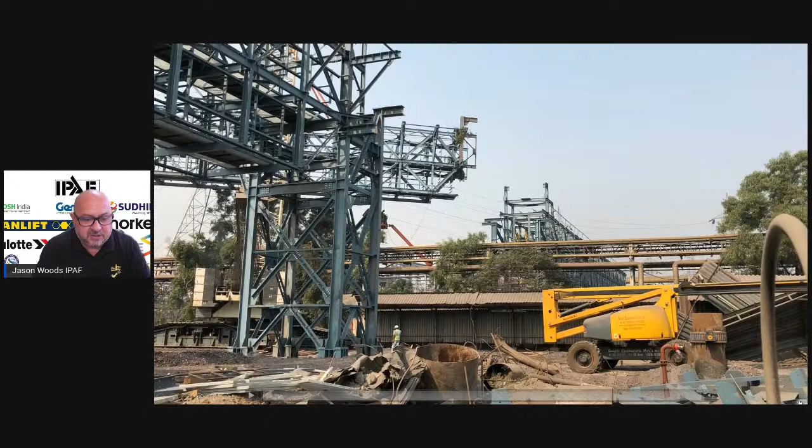In terms of today's session, today is a follow-on from where Chris just spoke about the case study of a project he was managing in the Middle East. As you've seen from the discussion, they were a very large MEWP user on the project through the duration.

You can play the video now, Ali, that's fine. They were a very large MEWP user, 900 pieces of equipment, different shapes and sizes, different phases, from steel going into MEP works, some spider lifts towards the finishing. You can appreciate that to manage this kind of equipment, having all the safety aspects in place from the day the equipment arrives to how we control it through the project. Naturally, with 900 pieces of equipment, you're looking at thousands of operators, and as Chris mentioned, 35,000 contractors on site at the peak, with more than 150 different nationalities there. So you can imagine the kind of workforce we're dealing with.

Obviously our focus today is more towards the operator, because it's a bit of a chicken and egg situation where we always emphasize the employer's responsibilities to train the staff, the workforce, but there has to be a turning point, and the turning point comes when an operator has now been trained, is on his project, has his equipment, and all of a sudden has to work.

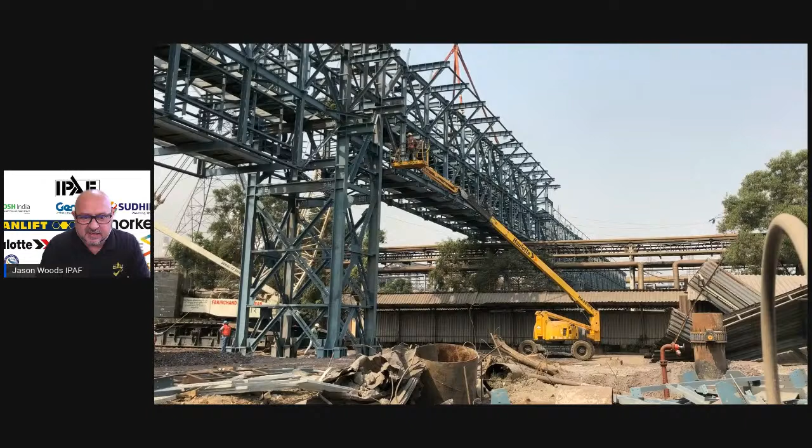Regardless of whether the machine is rented with an operator, which is quite the case in India, or whether it's a workman, a tradesman from the contractor who's actually going to operate the equipment, regardless who the operator is, we should start identifying the procedure from the operator and see where the operator's risks can occur. Now, operator risk is quite a big topic, so I'm only going to step into 3 key areas today, and as you'll see through the presentation, we will focus on probably the most highlighted ones.

Ali, if you can switch to the next slide for us. As you can see on the video just showing, it's just a typical construction site, nothing out of the norm, but you can see the activity, where the operator was generally at the ground and raising the platform into position. We had a hazard above where steel work was being positioned from the crane. And if you look very closely, you would have noticed that one of the passengers had actually climbed out, which, as you can see from my slide now, creates the real tipping point of operator risk.

So let's focus on the operator. Let's say we've done the training, the guy's certainly competent enough to get on that project. What do we find? Falling out of the platform is still a high risk. We still see it, in a term that the operator positions the platform where he's not quite in the right zone and the right work area, so he can't quite reach. So he has more of a tendency to climb and step up. Some only need to step up onto the mid rail, or unfortunately some go to the top of the handrail, which then increases the risk of that fall.

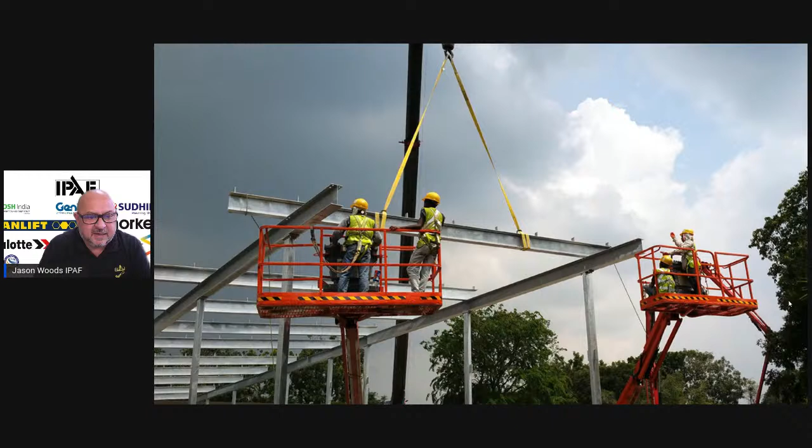Ali, if you can just go to the next slide for us. So again, some images, very basic images, typical worker working on a project. Are we doing anything wrong? Probably to the naked eye, you're going to say no.

But if you look very closely, I see a harness connected to a top handrail, which probably means it's not going to support that operator and keep him in a restrained position. It's the carabiner around the handrail, which would allow the operator to move and walk around the platform quite freely. We've seen some platforms yesterday where we can increase the size of the platform. So as operators, we still have a role, and we're obliged to make sure we're working safely.

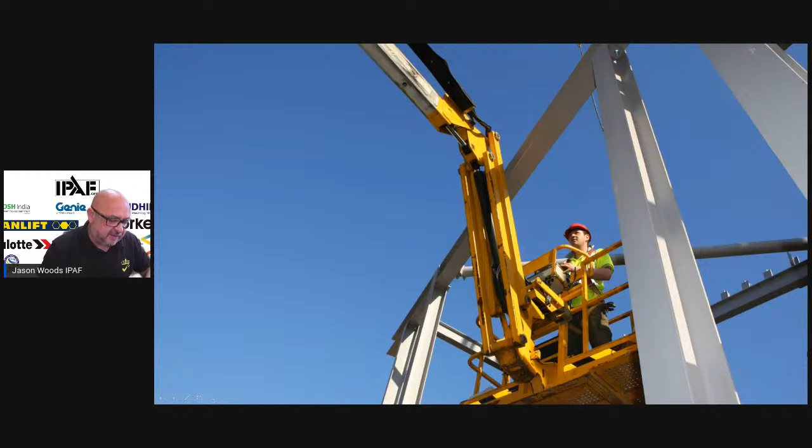So Ali, if you can go to the next slide for us. Again, just a very straightforward, typical application on a boom lift. If I'm a steel erector, I need to position my platform in amongst confined space at height. This is where it gets slightly challenging for the operator, because now it's not just about the drive positioning, it's now my lifting element. I need to understand the correct sequence of lift to get to the comfort zone for the operator.

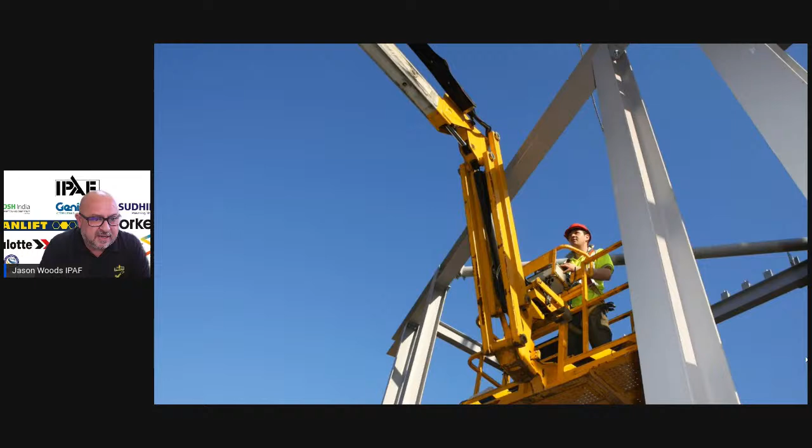Remember, once we're at height at these positions, we should have the ability as an operator to work quite safely. This is where the focus comes back to the operator, making sure the operator is actually trained and has certainly passed his assessments and exams, whether theory or practical. Okay Ali, let's go to the next slide.

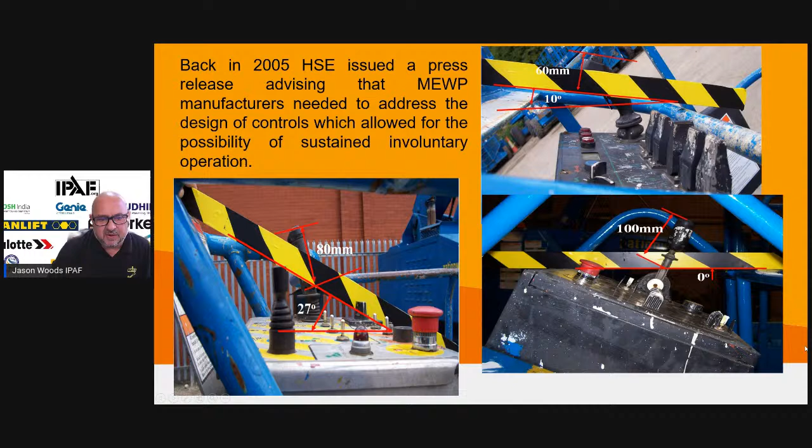Now, Ali, sorry, can you go back one slide a minute? As you can see on this slide, this is a platform control. If I take away the blue handrail in this case, that would mean I've got full access as an operator to these controls. So if I was to lean forward as an operator, I could potentially hit a control lever in that platform which I don't actually want to control. Maybe I'm working in a confined space close to the steel work, and if I'm not careful and not observing my movement, I've got a potential risk of an incident, meaning an entrapment. So as you can see, manufacturers back in 2005 started to put an emphasis on the control panel, raising a protector or guard around the controls, which would surely minimize the risk of an operator connecting with the incorrect control.

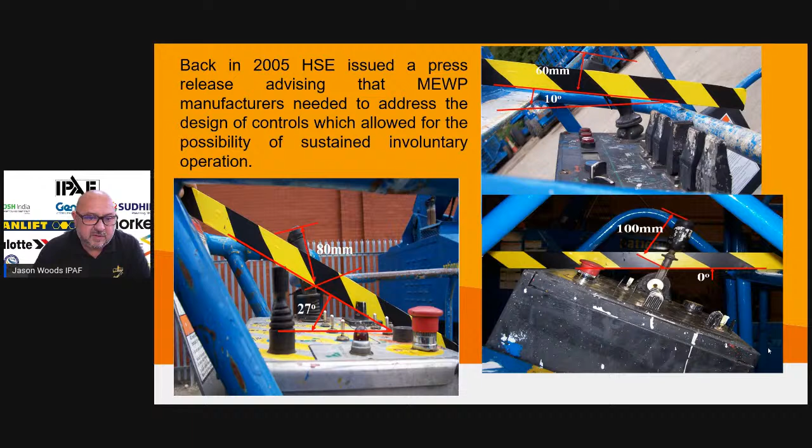Okay Ali, sorry, if we can go forward again now. So it didn't always just stay at a barrier around the controls. On the left side you can see a trigger. That would mean that if I needed to move, let's say for example my scissor lift, I would have to push the trigger in, and then I'm able to control that direction, either pushing forwards or backwards.

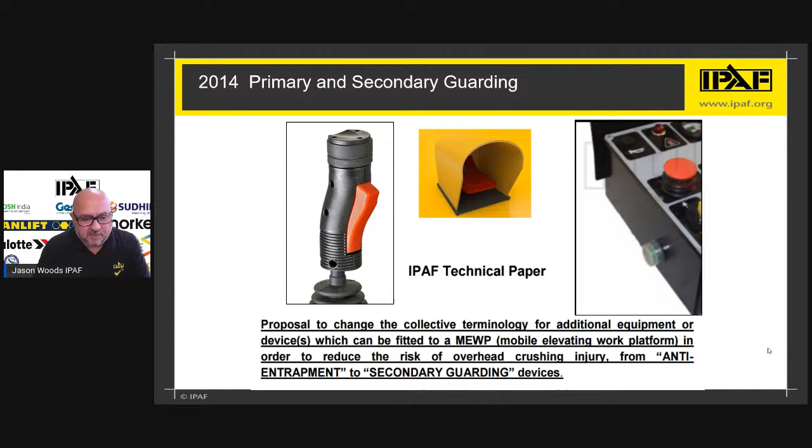In the middle, we'll see the old traditional foot pedal. That would mean that as an operator, I would need to push my foot on the pedal, then I would be able to function the controls. On the right side, you'll see a little green button on the side. That means I physically have to press that button in, and again, I can function the features on my control, whether I want to drive or lift.

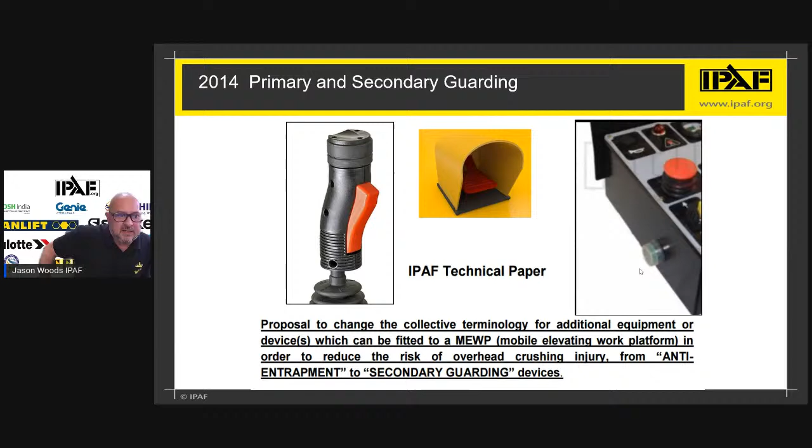But you can see that the research started a very long time ago of trying to reduce the risk of operators whilst we're elevated and working in confined space. So if we go to the next slide, Ali.

From a legal perspective, you can see that whether we talk about ANSI standards, EN 280 standards, or ISO standards, a lot of work in the early days was starting to be prepared. We'll call them white paper documents, but you can see that there's a chain of command, and this is our starting point. So at the very beginning, we listen to the audience.

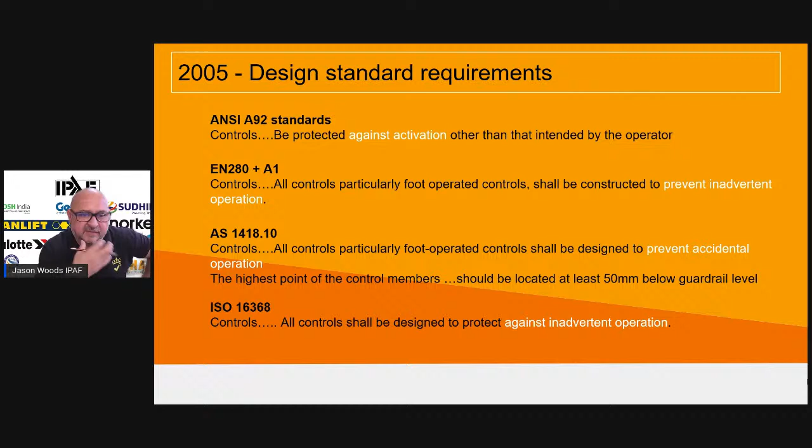The audience is naturally the MEWP operators. We research. As IPAF, we have a technical department, which does a lot of research, and we take in indicators of trend analysis of incidents, and then we push it through as a norm into work groups, which then moves into working with standard bodies and filtering it down as far as manufacturers. If you can go to the next slide, Ali.

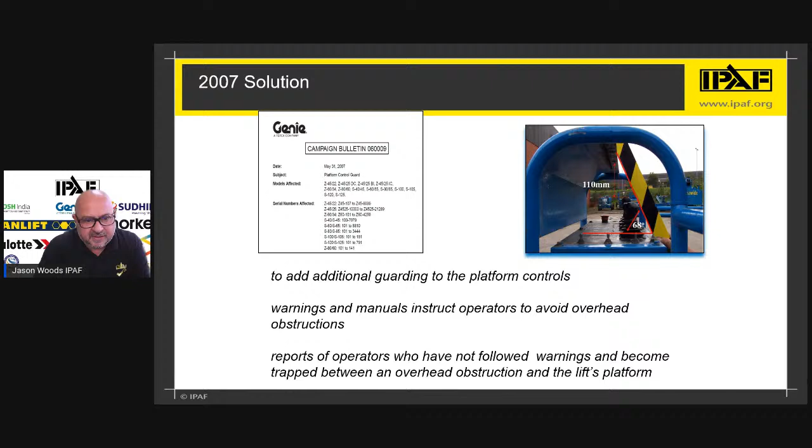Now keep tuned for tomorrow's talk, because we're going to talk about the voice from manufacturers out to the industry, and this is something which we're going to elaborate on in a little bit more depth with the guys. So Ali, if you can go on for the next slide.

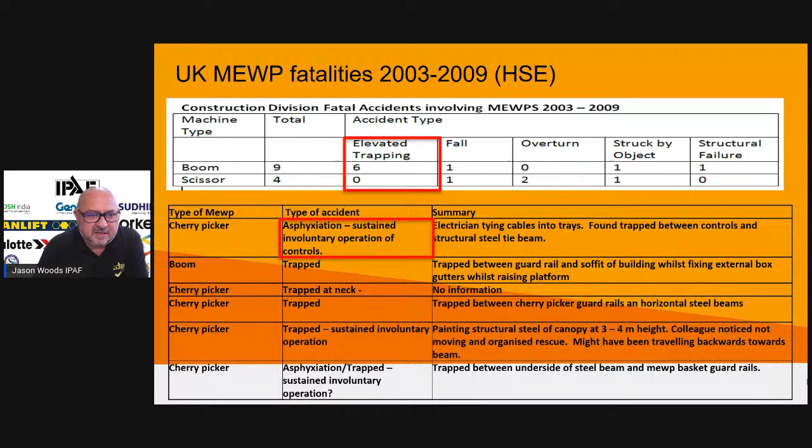Incidents are not new. Incidents have been out there for a very long time. If you imagine MEWP incidents, all incidents, we can only analyze what we see. So reporting of accidents is very important. It does a number of things: it helps us grow safety standards, it helps us develop training programs, and it helps us develop technical documents.

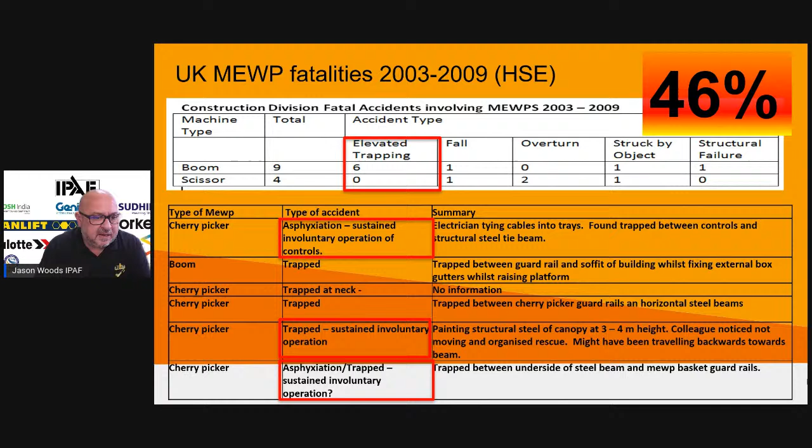Unfortunately, you get into a position where you're reactive to a certain level. However, there is that tipping point. If I use the IPAF technical team as an example, these guys are working very hard behind the scenes of development, and we will get to the point where we're ahead of the game, and it's certainly being a proactive position. Okay, Ali, if you can go forward on the next slide.

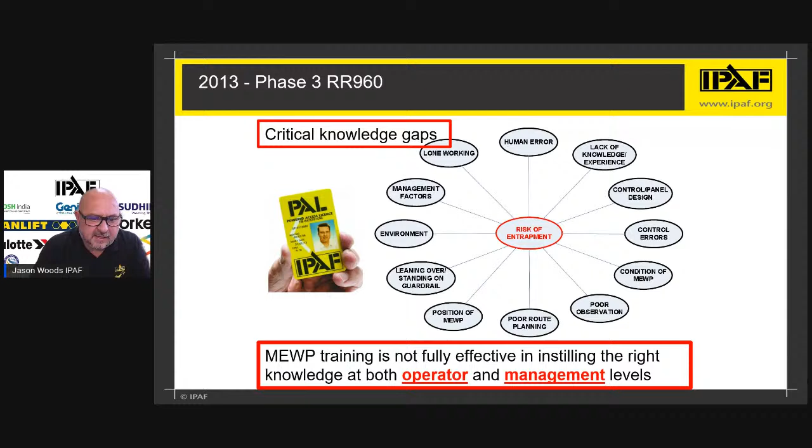Ali, if you can just jump forward. So let's talk about the development of the products now. Some of these names have already been mentioned earlier on. Secondary guarding was one. I know Chris spoke about this on his earlier presentation. Secondary guarding has been developed in such a fashion that it's there to either alert the operative or totally protect the operative.

So there are generally two different types of guarding systems. Now, let's not ever take away that the operator must be trained and competent. And like we've already spoken about training, surely there's a level of acceptable training. If I'm going to be assessed as a trainee, then naturally that's going to allow the operator to move the platform into position correctly and move into an area safely, because I'm always going to observe. However, there's nothing stopping us from having additional protection. As you can see on the left side, this is one example which has been out for a while, 2013 - it's an electronic version.

So what will happen is if I put myself in a trapped position, something is going to alert me as an operator. It's going to give me an alarm, and I have to act fairly quickly. With these designs, as an electronic version, the machine will cut out. On some versions, it will actually reduce the height by a few millimeters, taking any pressure points away from the operative if he's in that stuck position.

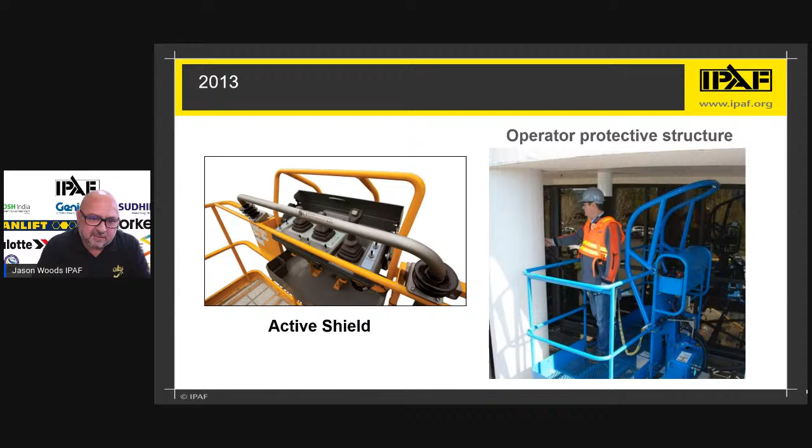Different manufacturers are coming in with different fashions and different guarding devices. You'll notice on this handrail that there's an inner handrail as well, to reduce nipping. If I'm raising the platform near the working edge of a building, naturally a worker will have his hands over the handrail. Now we're encouraging them to have their hands positioned on the inner handrail. Again, it falls under secondary guarding.

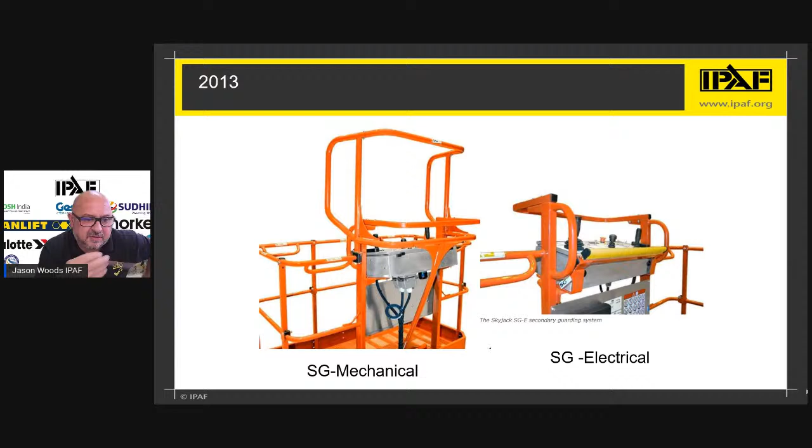I'm just giving you indicators of what is available on the market. We do have secondary guarding systems in India, and I would echo that if you feel your project needs this, talk to the rental companies and make sure the manufacturers are involved, because there is equipment available. But we must never forget about the operator. When he's trained correctly, he has a responsibility of moving that platform safely, so his eyes and ears are a massive help, and observation of platform movement is massive.

This device is an electronic device. If the body was going to become in a trapped position, it would naturally push the body forward, and once the body connects with the yellow indicator in front of you, the buzz bar, the machine would then cut out. This is just to give you an overview of where the development has been. Primary guarding was in the very early days, and then we moved into secondary guarding, anti-entrapment, and sanctuary zones.

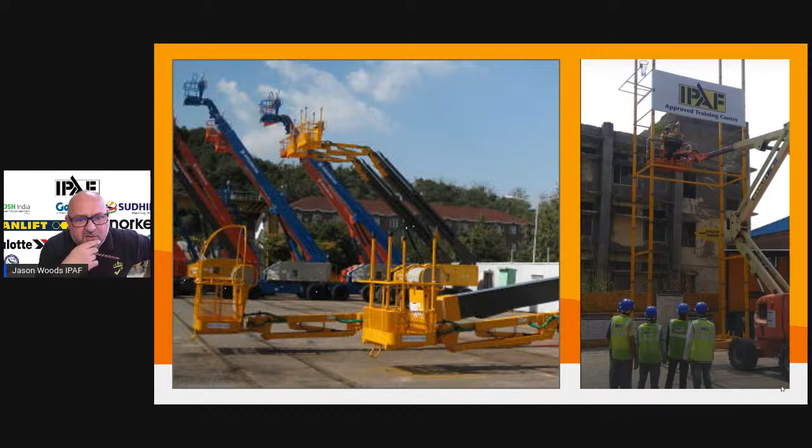Just a few more examples. On the left side, you can see sanctuary guarding systems, a physical cage, which protects the workforce if they have the need to work within a confined space. On the right side, this is one of our training centers in North India. If you look carefully, the person in the platform, part of his training, his duty is to position that platform through the confined space, creating a gap, and that's what I'm looking for.

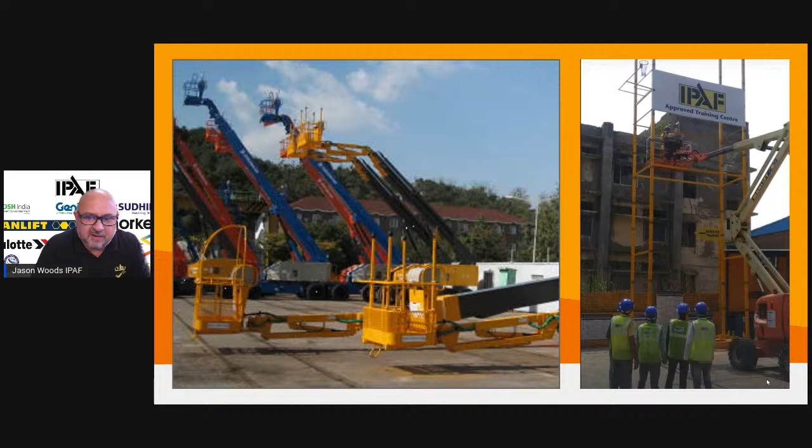A typical example of a very short video clip, indicating how an operator would move a platform into position. There's nothing unusual about this, but once it starts, you can see the observation of the operator is again quite a massively important role here. We embed these videos into our training programs, and if it's an instructor-led course, the instructor will play the video as he's running through the session with the students. If it's an e-learning module, then it's already embedded into the program.

As I say, there's nothing unusual about this. We're working on a construction site, in a steel frame process, maybe the roof is going on in this case, and we have a standard boom lift, or cherry picker as we call it, as covered earlier in the week. You can see where my focus is, that operator, and ideally I need to make sure he's safe at all times.

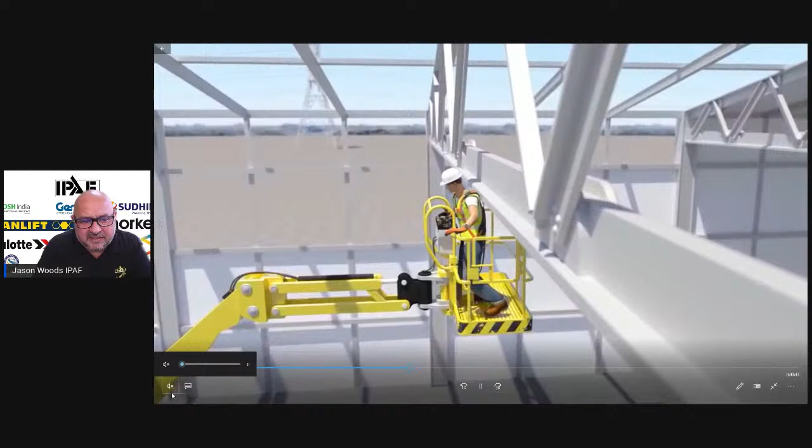This is what we must avoid. This is what we call entrapment. When we get to this position, the alarms need to be triggered, and the rescue team needs to be in position, ready to get this guy down safely. As you can see, by turning his body, using his direction of lift and his eyes, he's now putting himself in a safe zone.

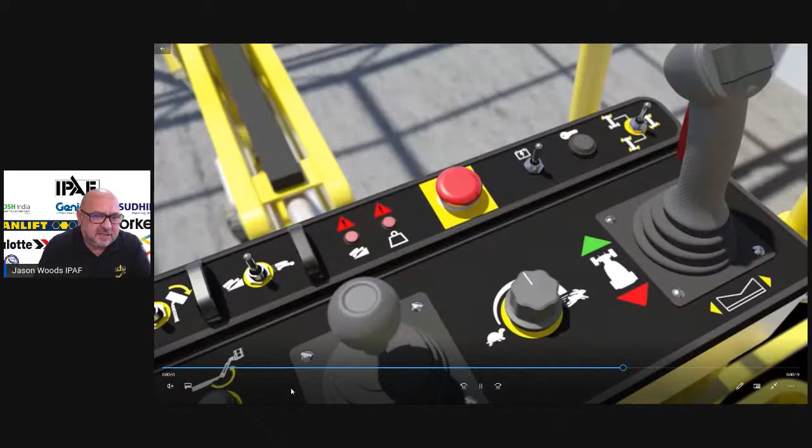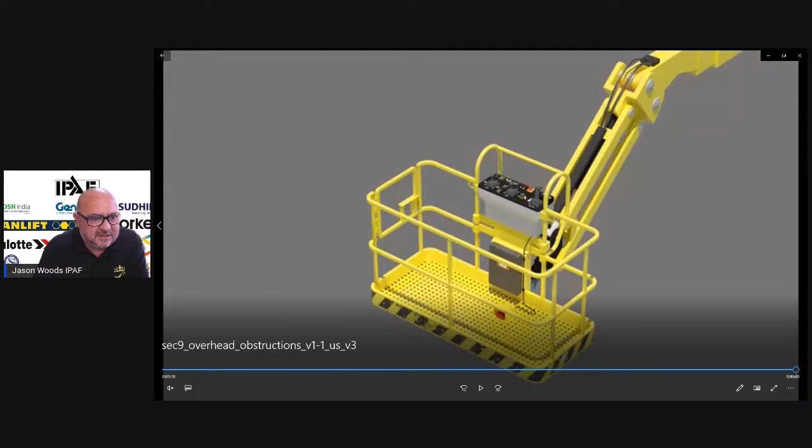This goes back to training - certainly training the operators, whether they arrive with the machine from the rental company, or whether we're dealing with the workforce, which is quite the norm, is trained. We must make sure that they're trained to the adequate level. I'm very pleased to announce that we have 5 training centers in India, and the pace is certainly picking up.

We do work quite hard with the instructors. We take them through a lot of professional development, where we run CPD with these guys. So we're always adding tools into the instructor's toolbox to teach. And we don't just come to audit the center, we actually come and help them develop tools for helping the students.

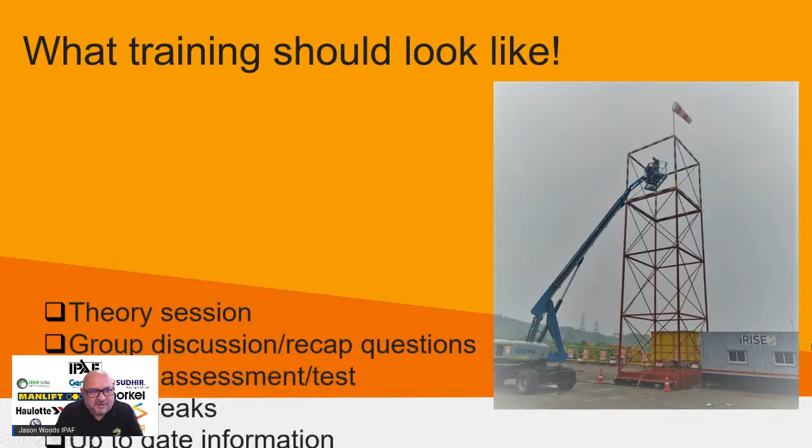Another typical training center of ours in India. What should training look like? You can see we should mix it, and the mix bag is certainly theory session, group discussions.

We call it recap - after each chapter of training, we would expect a group discussion to cover the chapter we've just discussed, so every student is always involved. We have assessments, which fall into tests. Naturally everybody needs to take a break - we're human beings, we can't keep teaching forever.

The good thing about the IPAF training programs is the content of the training material is up to date. We have around 90%, maybe more now, 95% even, support from manufacturers who are actually members of IPAF.

Part of the training is familiarization. If we have students who are not quite familiar with the controls, rather than going straight to assessment and tests, the instructor will step them through a familiarization program. It might take half a day, or it could even take 1 hour - it depends on the ability of the students.

And again, we move into tests. Once we get to test, we have to make sure that the operators are competent. Because what we'd like to do is give them back - when they arrive at the project, they need to come back confident. When you see their qualification, what we're looking at is that they're competent to work safely on site for you guys at the project. Because remember, we're stepping away now from employers' responsibilities, and heading straight to operator responsibilities.

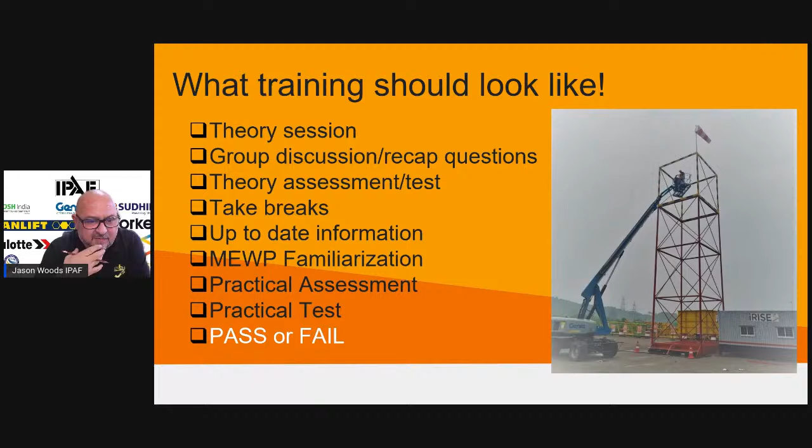Okay Ali, if we can just jump forward. Training is always continuing - innovations are certainly out there.

Virtual reality training - as IPAF, we've been working very hard with a few of the VR manufacturing companies and providers. I'm pleased to announce that IPAF has accepted some VR programs to be part of the IPAF program. I don't think you're too far away from having VR units also to support your training in India, which is fantastic news. The moment we can help contractors, operators, support employers and employers' responsibilities, and whatever white paper documents you have on site, we need to make sure that person is confident. By adding more and more tools into the instructor's toolbox, surely everybody is a winner around the table.

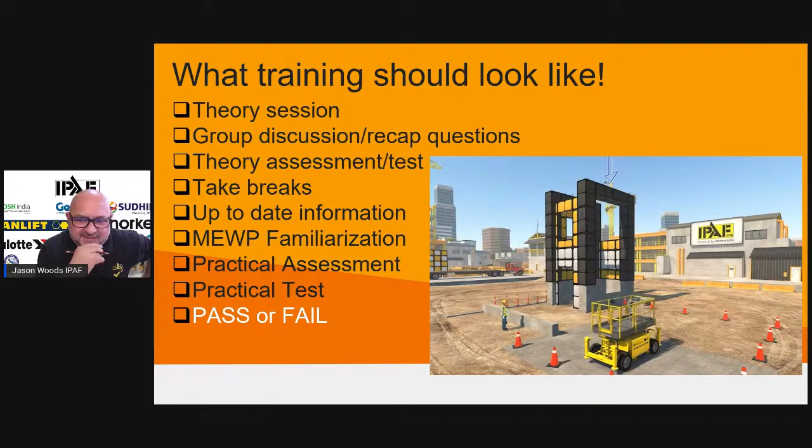The important thing is, let's pass the students, but let's pass them after they've passed their assessments from theory and practical. Okay Ali, let's go. I see Mr. Stephen Story coming online, which is quite worrying.

Okay, so other safety innovations, and this is quite new. Again it falls under the remit of secondary guarding, and it helps the operator a little bit more, or less. So Ali, if you can just jump to the next slide.

It's very short. Halo is a safety awareness device that alerts the user when there is a risk of unintentional contact or overhead entrapment whilst operating a MEWP mobile elevated work platform. The Halo attachment is worn by the user rather than a device fitted to the MEWP. Halo attaches to a specific safety helmet and doesn't rely on the MEWP having an additional device fitted.

In 2016, there were 66 reported fatalities involving MEWPs worldwide. The main causes were falls from height, entrapment, electrocution, and overturn of machinery. Entrapment accounted for 18% of reported fatalities in 2016. Worryingly, this is trending upwards from 16% in 2015.

There are currently over 1.5 million MEWPs in rental fleets across the world, with less than 5% of these having entrapment contact alerts. The Halo is less than 10% of the cost to install an alert device on a MEWP currently. The Halo device can be used on any MEWPs, from large boom lifts, scissor platforms, even on low-level access platforms.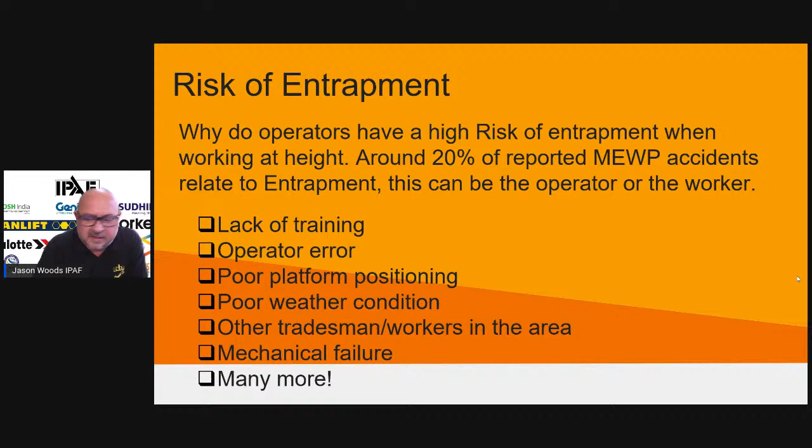I hope that has given you a good overview of entrapment and what's available out there. So now I'm just going to have a few slides on two other areas which I feel are quite important, especially in the Indian market.

Machine tip over is not new in the region. We do have reports of machines tipping. Can it be avoided? Of course. We need to do a few things first. Training from the HSE department right down to the operator is massive. Making sure that the machines are fit for purpose and in very good condition, meaning they're able to be operated correctly.

Back to that training, we need to make sure the operator totally understands his work zone. And that doesn't mean just from where he's elevated, I'm now talking about the ground area.

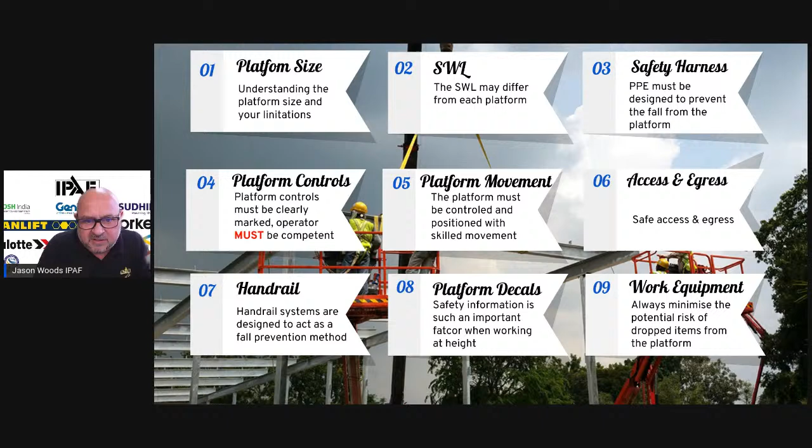So again, that's a real big key topic, and I don't mind opening up individual sessions for these. So Ali, if we can just jump to the next slide.

So one final slide, you know, let's focus on what your risk elements are. And as you can see, there can be more. Of course there can be more, but there's certainly a lot.

Let's come away from operating the machine at ground, because that's a non-starter. Really, the ground controls are there simply for function checking and emergency descent, rescuing that operative. So let's keep that very clear. Let's come away from that, and I think that's one good positive step that comes out of this week of India Safety Week.

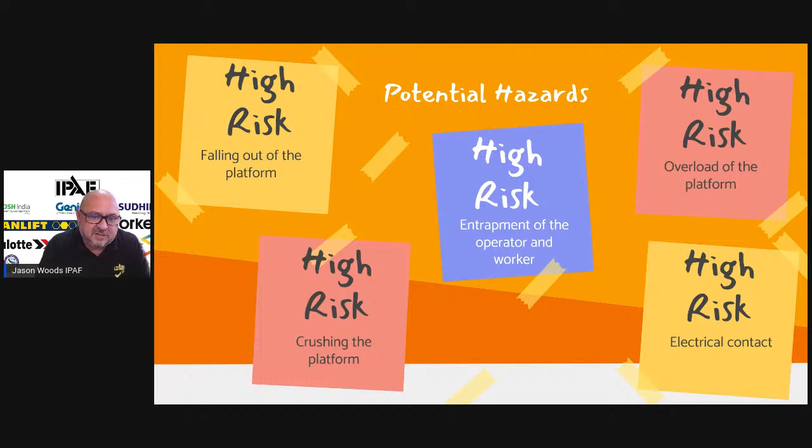We are here to help safety professionals, and we are here to try and help projects stay in that safety zone. Okay, thank you very much Ali. I think that is our last slide. Thank you, I hope that it was beneficial for you guys.